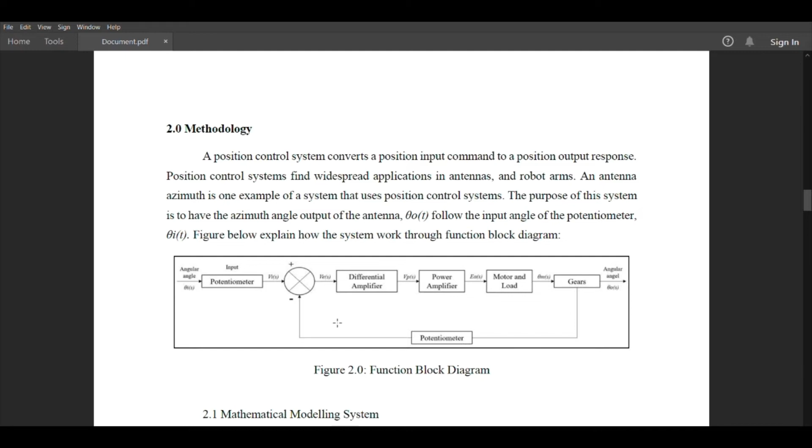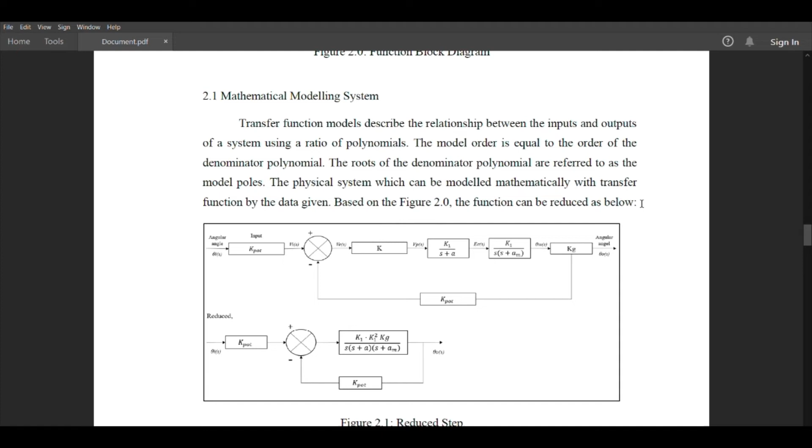Continue with 2.1, the mathematical modeling of the system. A transfer function model describes the relationship between the input and output of the system using a ratio of polynomials. The model order is equal to the order of the denominator polynomial. Then the roots of the denominator polynomial are referred to as the model poles. Then the physical system can be modeled mathematically with a transfer function from the data given. Based on figure 2.0 below, the function can be reduced as below.

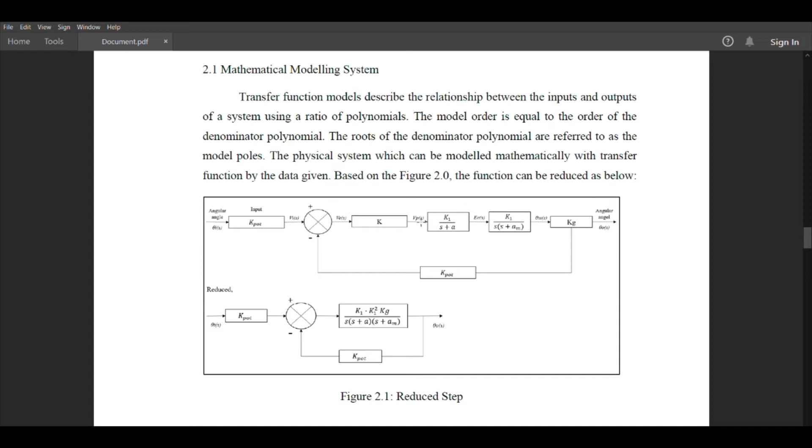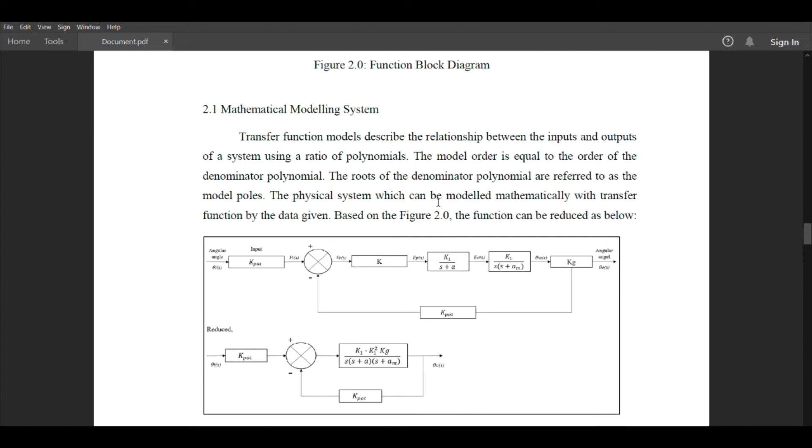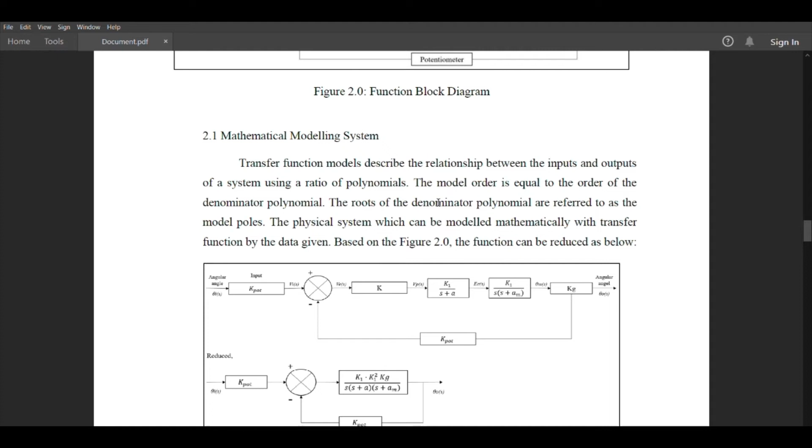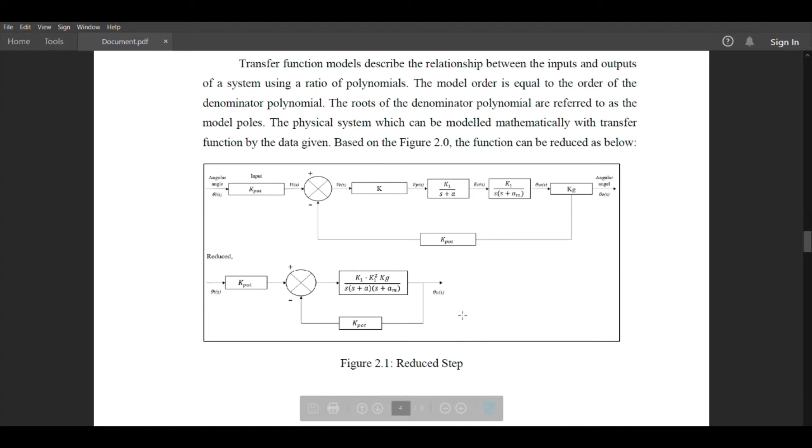K, which is the differential amplifier, K1 divided by S plus A. Then continue to K1, S times S plus AM. Then it can be reduced as stated in the figure. So these are the formulas for the reduction.

T is equal to G times S divided by 1 plus G times S times H times S. So just compare the G, which is we can get K1 times K1 squared Kg, and divided by S times S plus A, then multiply by S plus AM, and this is the formula we get.

Then we just substitute it into the block diagram. Then this is the final equation.